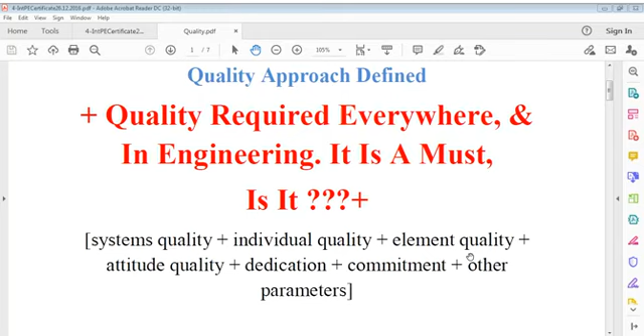Means we should think of system's quality, or we should think of individual's quality, or we should have element quality, or product quality, or what should be our attitude for quality, what should be our dedication for quality, what should be our commitment after all, and what should be other parameters that should be considered. These points come to consideration as a whole.

We simply can blame, the system is not working. We simply can say the system has broken. What do you mean system has broken? Or it happened because some spare part didn't work, or out of 100 parts, one part didn't work.

Well, you can answer, you can respond in whatever way. You have got the money, you are not going to replace. You say, I will repair this. Because you know the consumer is dependent on you. What to do? If I don't buy from you, I have to buy from someone else, and the same thing happens there, the same instance happens here.

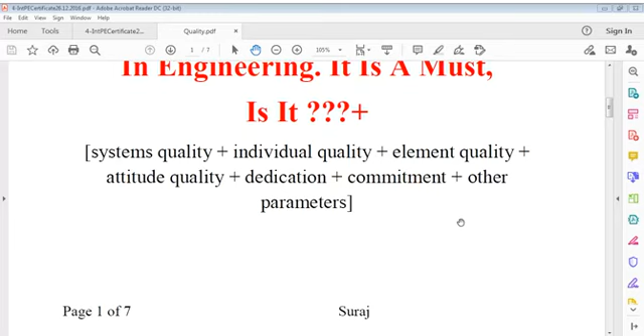Means even if the system works, the product doesn't work. I think performance cannot be measured, it can be understood only. How to measure performance? Because there are many restrictions possibly, many pros and cons.

So we have to be very serious about the quality issue. Now I say we deal with structures, we deal with other items, machines, appliances. We have to use all.

As a user, what I think, and as an engineer, what I think, and as the in-charge, what I think - these are all different issues. When I talk of structures, of every item, every machine, every building, wherever structure is concerned,

I have to talk of quality. Previously we used to think quality is meant only for materials, only for workmanship. No, quality applies everywhere - in process, in manufacturing, in construction, in procurement, and in delivery of material, delivery of service. Everywhere quality lies.

That's the only reason when somebody serves you from some company under AMC or otherwise, they immediately call and say please rate our services on this URL. You fill up this form and tell us how it was - time-wise, punctuality-wise, did that guy come or not, did he understand the problem or not, did he explain what he should do, what was his grade of service. They immediately ask for that, just for an hour or half an hour of service - they raise 10 questions.

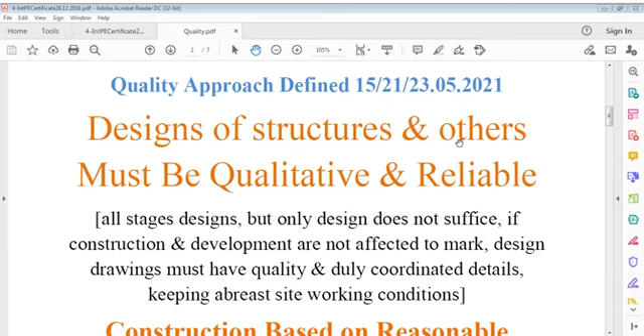All stages of design must be concerned - we have to be concerned about all stages of design. If design doesn't satisfy or suffice for the customer, if construction and developments are not affected to the mark, design drawings must have quality which they don't have.

They must be coordinated properly, but they are not coordinated properly. These are IFC drawings - issue for construction. You cannot issue a drawing for construction until it is coordinated well. Exceptions are there, but when you say it's an IFC or AFC drawing - approved for construction or issued for construction - this must be duly coordinated, having all details required for construction and for site working conditions.

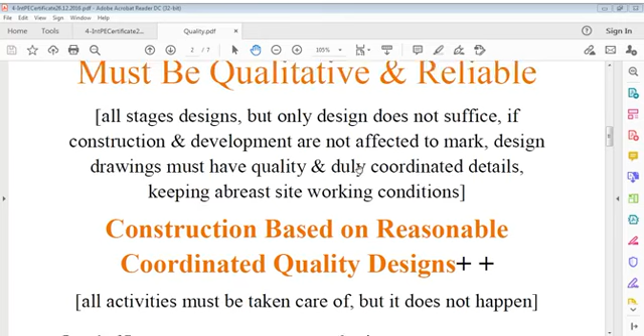Structural engineers must take this into consideration. They have no right to say only this was left and that was left. You have a duty to deliver drawings which are competent and consistent. You cannot deliver incomplete drawings and say they should demand it later on. They will demand or not demand, that's different - you can't issue incomplete drawings.

It's your duty to check it. You cannot say that one person checks and another checks. It's not a question of checking, it's not a question of endorsement, it's not a question of proof checking. It is a question of detailing.

Drawings must be completely detailed - it must have the status of a working drawing, not a simple drawing. A drawing looking at which people start working should have that status; it should be a speaking drawing. I cannot say every drawing is like that, but I just suggest what I feel - there may be some lacuna.

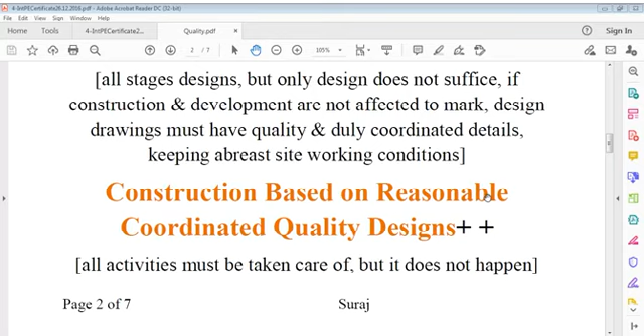Construction based on reasonable, coordinated, quality designs is a must. All activities must be taken care of, but you know what happens. Now, what should be the way to achieve that?

It's the duty of the site man also, the site person also, to coordinate drawings. I'm not saying exclusive responsibility goes to the designer. The designer has the design part of responsibility - when you issue structural drawings, they must be duly coordinated in all respects.

But there is another coordination to be undertaken by the site representative, site agent, or site organizer/leader. Drawings used for construction activities must also be duly coordinated - meaning coordination of architectural and structural detailing, coordination of structural, architectural and services detailing. Everything must be organized properly, studied properly, and if somebody finds a conflict, questions should be raised for correction and resolution of that conflict.

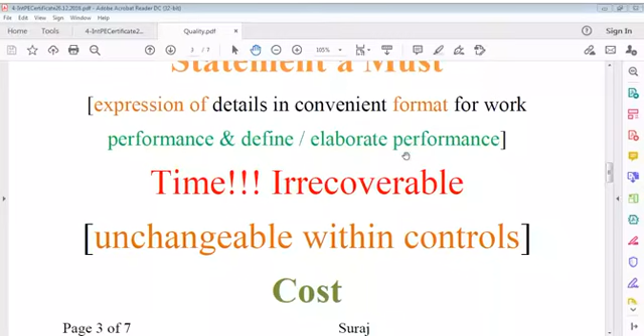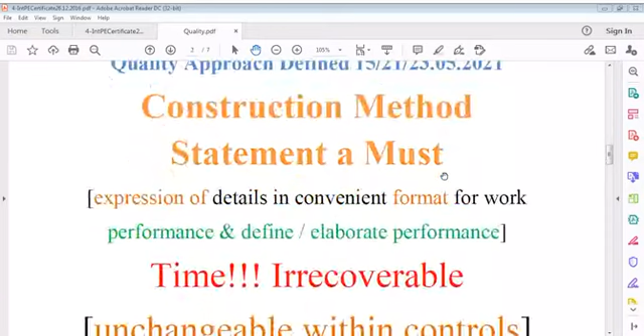This is very important - if you don't have these drawings, this causes interference and work stops. So what I am saying is about this method statement that I'm talking of. You know what a method statement is.

There are specific method statements on which a site project runs, and these are different ones. All disciplines' method statements are required, and all shop drawings and working drawings are required. All coordinated drawings are required too - it's not only shop drawing and working drawing, coordinated drawings are also required.

You may ask, what is this shop drawing, what's working drawing? Yes - shop drawing or fabrication drawing, working drawing or site execution drawing, and coordinated drawing, which is different.

If you do coordination drawings, for example, there are many services running in external work, many services running in some complicated areas, so you have to draw services and then see there's no clash, and these services have compatibility with each other - electromechanical or other compatibility - so piping and other elements should not clash, and there should be enough space to accommodate them. That's called coordination drawing.

Coordination drawing means where all services are shown and specification models and codes are followed up, and then there should be no clash. These services should pass comfortably in their vicinity, vertically as well as horizontally, with complete accommodation - that's coordination drawing.

It depends on your project, it depends on requirement. Sometimes you can see many clashes, and those clashes should be avoided. Construction method is not alone, it's not simple writing. Method is a mix-up of various activities of construction, designs, or semi-designs. There are so many involvements in method statements, that's what we call methodology - science of working on site, not science in laboratory. It's the system you have to form to work specifically per requirements on site.

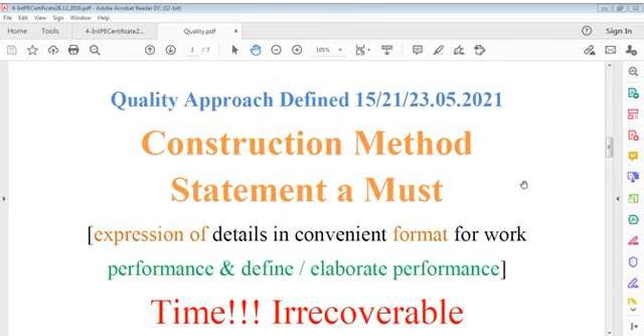These are design work related, and we have to take into consideration all this approach.

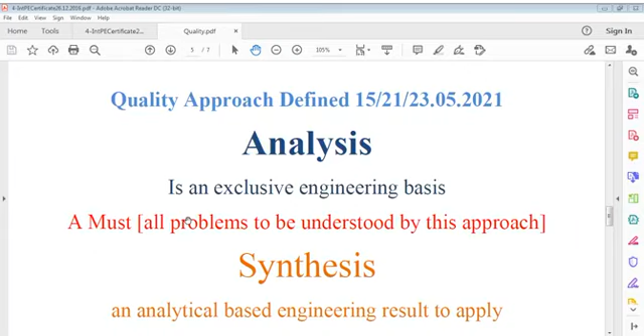Now I will come back to this file after going through some other file, and that file is that last time I was doing on quality requirement. On the quality requirement file, I was working on that, and I tried to share it today, but I could not due to whatever reason.

In this there are many statements I have put in. There are only 44 pages, but there are some very specific statements - or not statements, actually it's just a checklist, or certain points to be kept in view. I'm just giving a title. This is checklist and ITPs, though these are not ITPs actually. These are just support to checklist and support to ITP. What we have to consider in a specific activity is a miscellaneous type of statement to provide information to those engineers who have to work in the field.

What does checklist mean, and how can you convert this checklist to ITP? Checklist means items to be checked for work that has been done or to be done on sites or on projects, and then how to take these items into the form of inspection and test plans.

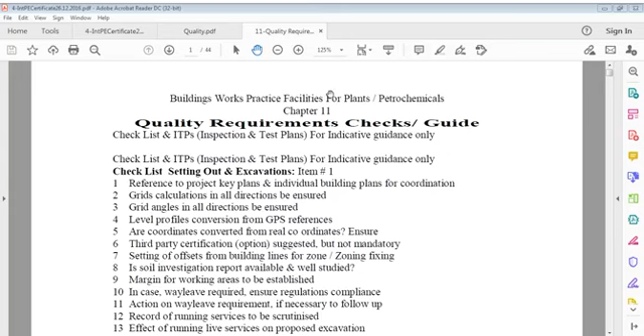So in this case, I started with setting out and excavation. I talked at length about that one. Then I...

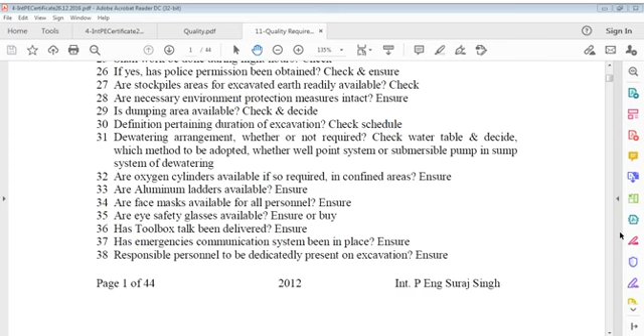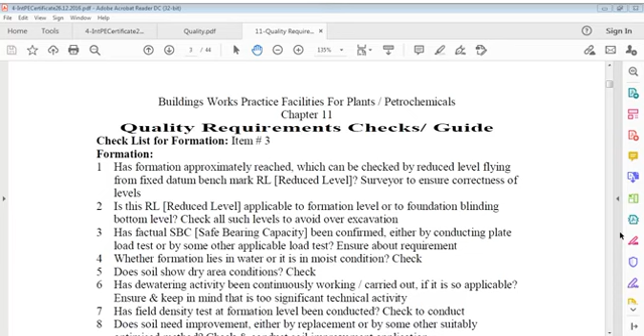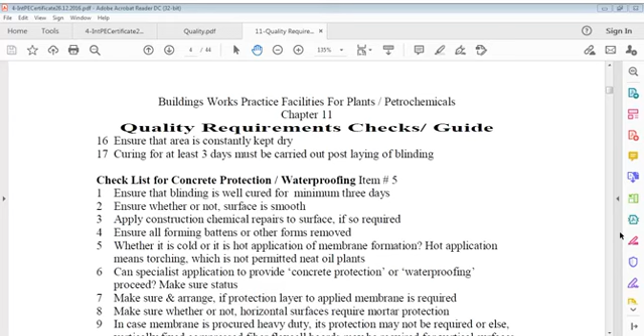jumped on to - I will come back to this item later on for further explanation. I am just giving you these titles. Then it was about hand excavation, and also this was about formation below foundation, or foundation level. Then it was about the blinding item. After that it was concrete protection and waterproofing, both are the same. After that it was foundation or footings preparatory works. Then stub columns preparatory works - stub, S-T-U-B, stub columns.

For my consideration, stub column in this point, in this checklist, is that column which starts from foundation, footing, and goes to plinth level. From there, exposed column starts. This stub column remains embedded in soil.

To my experience, some people may have different experience, I know, and they define it differently, but here is what I can say. My thought and my experience based...

There is a definition in one page. A stub column is a column whose length is sufficiently small to prevent failure as a column, but long enough to contain same residual stress pattern that exists in the column itself.

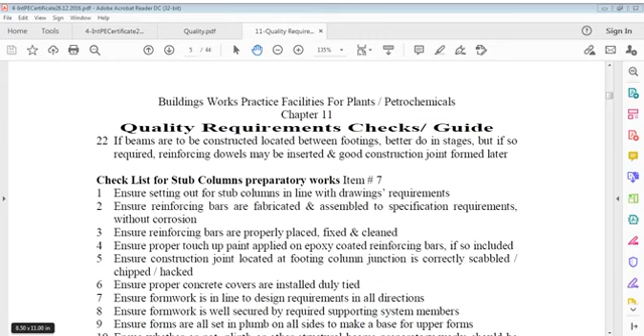So we can say I have explained my meaning of stub column, so there should be no confusion. That's what I think about stub column, and we have used this term on our projects.

So stub columns, and then we go back to backfill works. Backfill, which is a very important item. I can say it's very important item. Then backfill is also having some more.

Let me see if I can get some information on backfill. You can say backfill information, backfill designs. I can say backfill designs. Backfill design.

I say this is mine backfill. I'm not talking mine backfill. What it says is backfill designs. I'm talking of something very important item. How can you design backfill?

I read somewhere in the document, that's a different case. Let me see if I can get some very good information on that. It's maybe, probably. Let us see what is that. It's going on, opening. Oh my god.

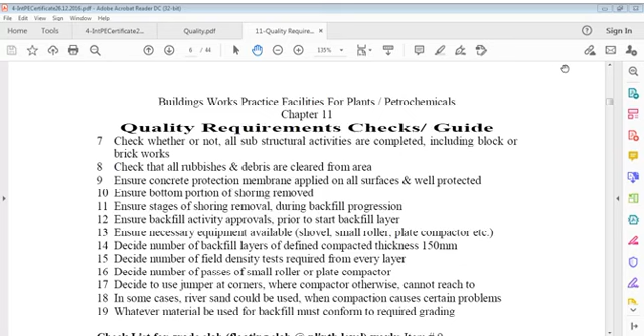So I can read it again if required, because this is very important, and this is the checklist for backfill work. Though I have read it many times, just for refreshing, you can go ahead, no problem.

Make sure that selected fill, imported fill, or desert fill materials are approved, and make sure that recommended additive materials are made available if required. Make sure stocks of backfill materials are located in a reachable place, and make sure different fill materials have been procured and mixed in defined proportion in case backfill material has been designed to meet fill requirements to achieve required grading of FDD.

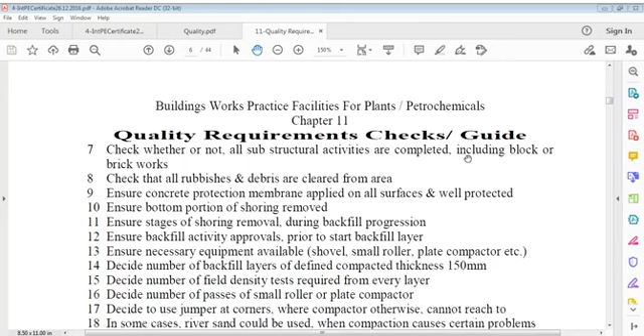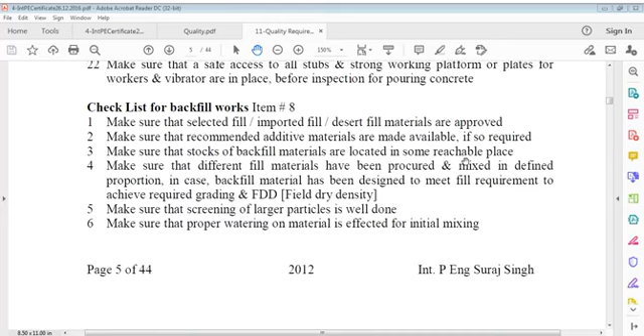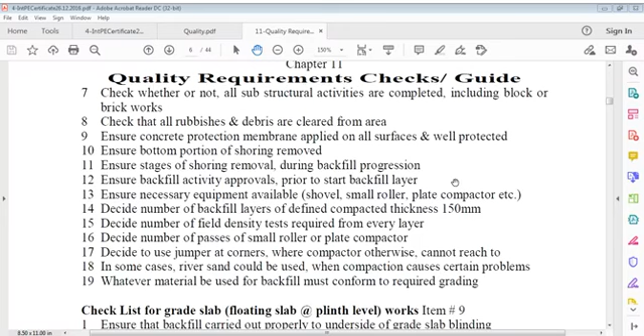Required grading FDD is field dry density. Make sure screening of large particles is well done, and make sure proper watering on material is effected for initial mixing. Check whether or not all substructural activities are completed, including block or brickwork. Check that all rubbish and debris are cleared from the area. Ensure concrete protection membrane is applied on all surfaces and well protected.

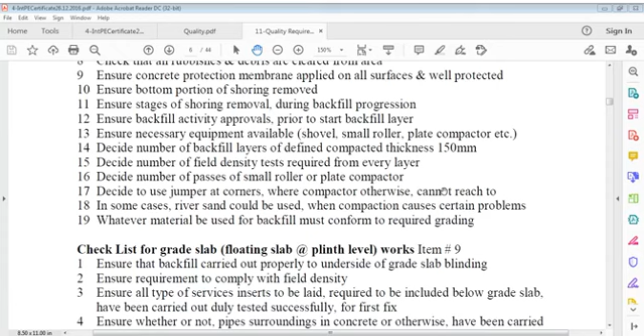Ensure bottom portion of shoring removed. Ensure stages of shoring removal during backfill progression. Ensure backfill activity approvals prior to starting backfill layers. Ensure necessary equipment is available: shovel, small roller, plate compactor, etc.

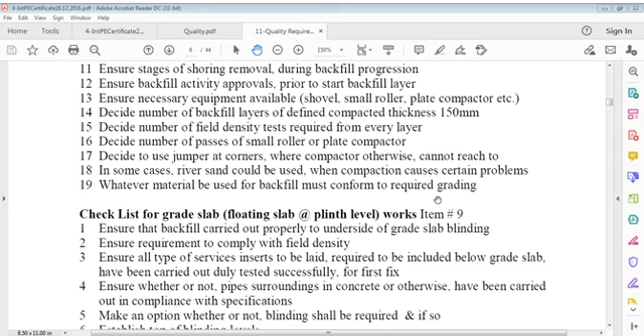Decide number of backfill layers of defined compacted thickness, 150 mm. Decide number of field density tests required from every layer. Decide number of passes of small roller or plate compactor. Decide to use a jumper at corners where compactors otherwise cannot reach. In some cases, river sand could be used when compaction causes certain problems.

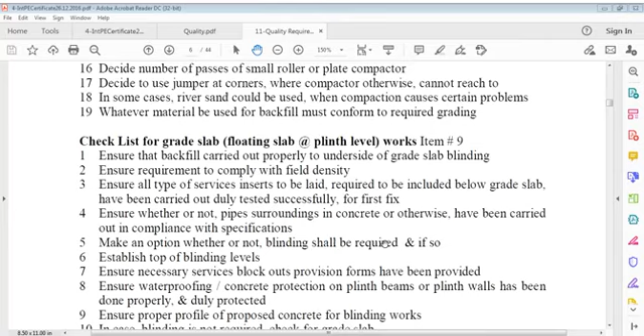Whatever material we use for backfill must conform to required grading. These are very normal items. You can extend this checklist depending on your material and your work.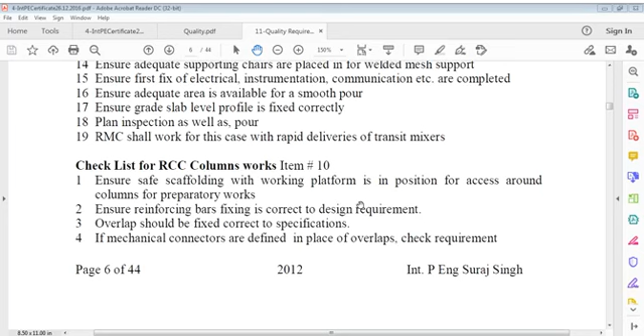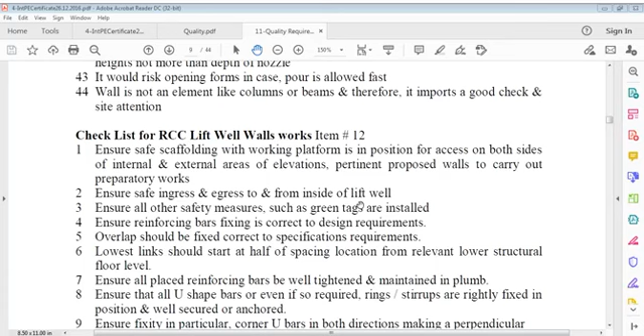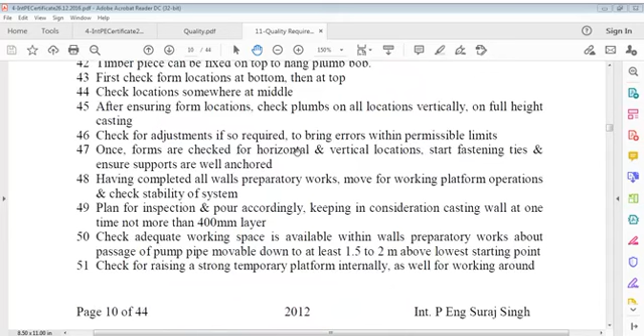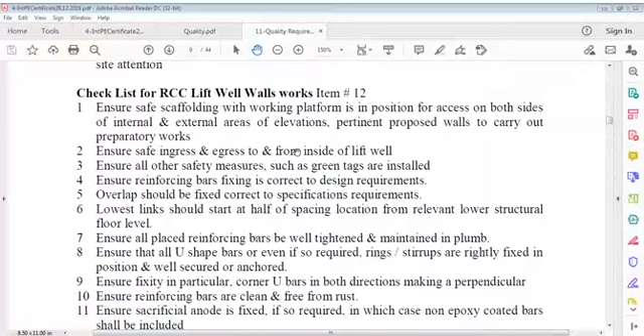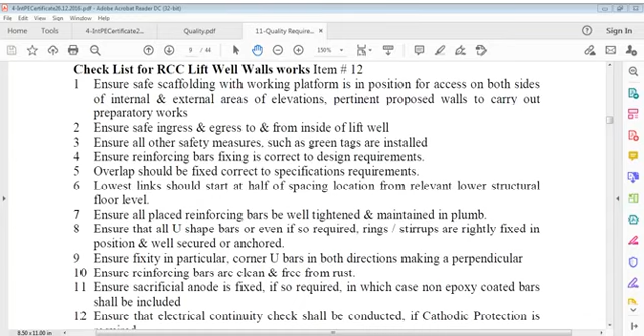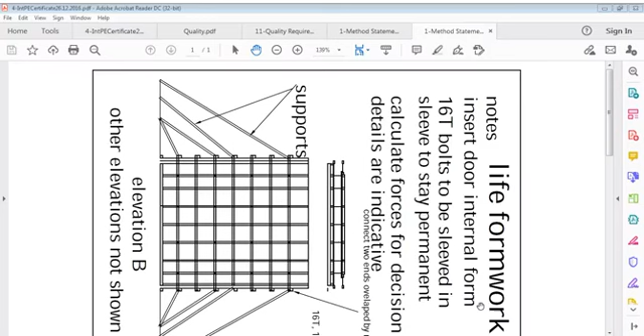Water reservoir. Wall form and lift form, I will show you both for your reference. Lift form and wall form, both are important, so I will show both so that you are clear. It is now, and also another one, I'll just show to you, explain to you, and put back. First you see, this is that.

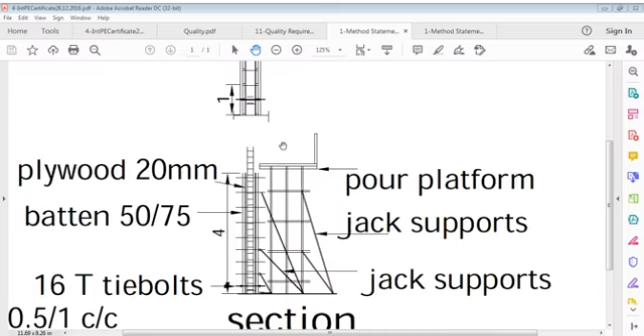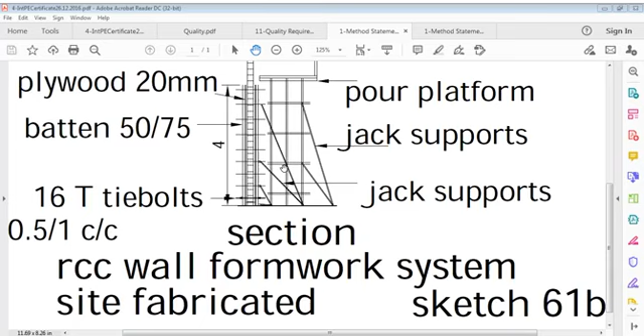This is for wall, RCC wall. You can see this is the wall. Let us say it is 4 meters high and whatever thickness. It is doubly reinforced, so thickness shall be certainly more than 20 centimeters, say 30 centimeters. No problem, there are some shear walls you can say, there may be some other walls, fascia walls. 30 means it is a shear wall and structural wall, you can say, and it is 4 meter high, so it's considerable. When it's 4 meter high, means we have to cast 4 meter height in one time, no stage casting, 4 meters means 4 meters. Here you can say 20mm thick.

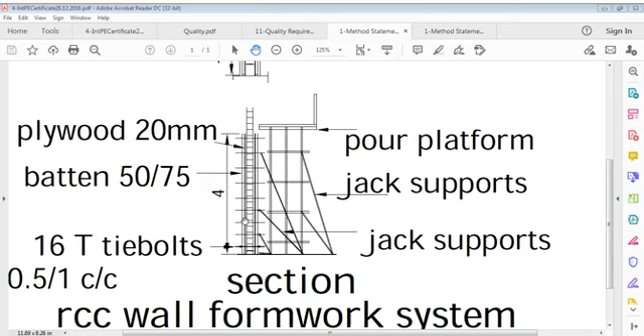Tie bolt, which is half to 1 meter center, and here is steel reinforcement inside, and then various locations where supports would come in, and you can see this is the plan. Okay, this is continuation of that. This is 1 meter spacing here.

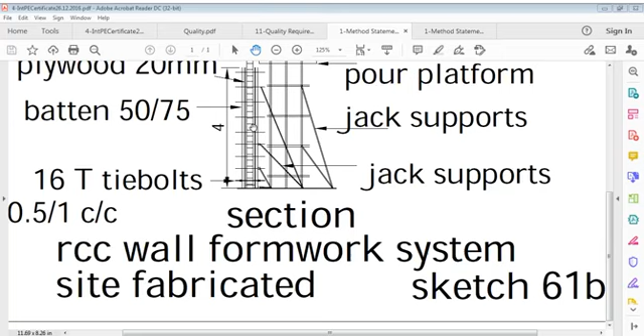Okay, let's see now, this is generally a standard type design or diagram or sketch for a certain RCC wall formwork, and this is site fabricated. It can also be, you can say, hired from some proprietary manufacturer who manufactures forms. It's up to you, if you can do yourself, do yourself. Let us see now what is here in this. Of course there is ply, and that is supported, fixed backing by timber at defined spacing, or you can say fabricated plates of plywood and timber are erected and various connections are given. That is normal. The important point is what?

The important point is we have to provide tie bolts, yes, that are here in this. This can be erected directly, no problem, and these locations can be made sure, no problem, for plumbing. Important is this: when you fill in concrete, it's fluid, it's liquid, it stays there as liquid for a couple of hours, and that liquid transmits horizontal pressure, or you can say resultant pressure according to fluid mechanics. This is height, and pressure depends on density. In water we considered density as 1. In concrete we shall consider 2.5 tons per meter cube. So 2.5 into 4 here.